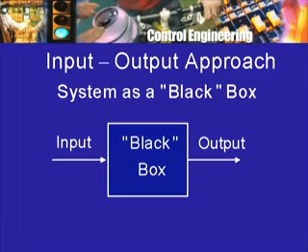So, what do you do with regard to time varying or time invariance property? Well, as the phrase suggests, what we have to do is what is called time shift or time delay, usually in practice, an input. To take a simple example, one may apply to a system a pulse of a certain duration of a particular shape, let us say, starting at some particular instant of time, and then observe the response for some period of time. Then after some time you may again apply the same pulse, that is pulse with the same shape, same width, etc., and observe the response.

Now, you are applying in a way the same pulse, in the sense the pulse shape is the same, but you are applying it starting at a different moment of time. So, this is what is meant by a time delay or a time shift. The response, of course, for the shifted or the delayed pulse will begin later, but what you can ask is whether the shape of the response is the same as the previous response, except for the time shift. Now, of course, this can be done with the help of some notation, and it is the idea that is important and not the notation.

Given any function of time, say f or f of t, one can talk about its delayed version, and several notations are in use. Since we have already used the letter d to indicate derivative, I cannot use d for delay, but one may use the letter delta for delay. So, delta is the delay operator, and then you have to indicate by how much time interval the function is going to be delayed. So, I could write it as delta with a subscript tau, tau being the time interval, operating on f. Now, this produces the delayed function, the function f delayed by an amount tau.

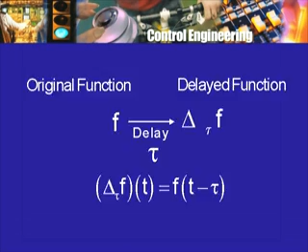To take a specific example, let us say here is the time axis and here is the pulse that I talked about, and let us say it goes from 0 to 1 second. So, this is the function f, as it were, and now if I were to delay it by, let us say, 2 seconds, then the pulse will start here at 2 seconds instead of starting at 0, and then it will last for 1 second as before and go to 0 at 3 seconds. So, this function will be denoted by delta tau f, or in this case, since tau is equal to 1, delta 1 f, that is a function f delayed by 1 second.

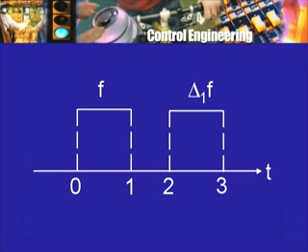So, if this is the input, there will be a certain response, then you apply this input and you observe the response. Just as this input is the delayed version of this input, you try to see whether the response to the delayed input is a delayed version of the response to the original input. If this is so, the system is said to be time invariant, and if it is not so, the system is said to be time varying. Now, this does not require you to know what is inside the black box, what kind of devices, what are the differential equations or algebraic equations or whatever that relate the response and the input variables. It is a test which can be performed externally, so to speak.

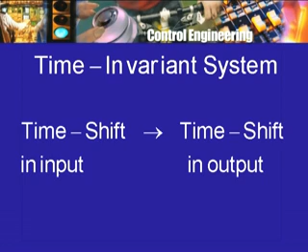But on the other hand, as you are already familiar, one can look at the set of equations or the model, and by looking at the form or appearance of the model, one can say something about time invariance or time varying nature of the system. Again, to start with a very simple example, if the relationship between the input u and the output y is simply y is a scaled version of u, y equal to au, then it is not at all difficult to see that this system is time invariant, and of course, the coefficient a is just a constant.

Whereas, if I had y(t) equal to a(t) into u(t), where a(t) was a function which was not constant, then one can see that the relationship between the input and the output is going to vary with time, and therefore, the system described by this relation is not going to be time invariant.

Similarly, if I write down a differential equation, let us say Dy equal to ay plus bu, as we have done already, a little argument will show you that if the input is delayed, the response will be delayed, and as in the case of linearity, provided the initial condition is 0 or the initial condition remains the same.

That is, the response to an input starting with an initial condition 0 is one, and response to the delayed input starting with the initial condition after that delay also 0 is another response. Then the response to the delayed input will be the delayed version of the response to the original input. This can be seen by actually making use of the definition of the delay operator and substituting in the differential equation and seeing that this is so.

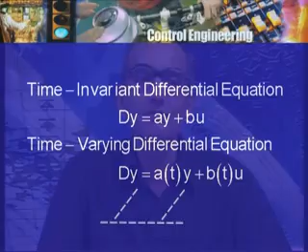That is, shifting the graph horizontally along the t-axis does not change the derivative values, it only changes the instants of time at which the various values are taken by the derivative. Of course, the shape of the wave or the function remains the same. So, this is a property of differentiation, that differentiation is invariant with respect to time shift, or to use a more sophisticated word, translation in time. So much for time varying or time invariant and linear or nonlinear systems.

And as I said earlier, the method of Laplace transformation and therefore the S domain methods using that, such as the root locus method, the Routh criterion or test for stability or location of roots of a polynomial, and the frequency domain methods such as the method based on Bode plots, Nyquist criterion, Nichols charts, etc., are not applicable for systems which are nonlinear, that is, which are not linear, or for systems which are time varying or not time invariant.

Now, of course, as I told you earlier, nonlinear systems and even time varying systems do occur in nature and in engineering practice. The pendulum, whose swing is not sufficiently small, or in fact for no amount of swing, is the pendulum exactly described by a linear differential equation. So, it is a nonlinear system. The fly ball governor would be another example of a system where there would be a nonlinearity.

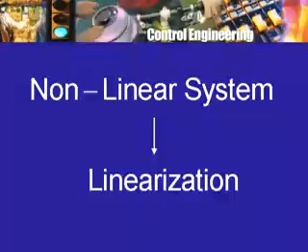Now, of course, this only results in an approximation, and unfortunately one may not be able to know or say much about how good the approximation is. This is one of the major problems which persists even today. In fact, the nonlinear model of the system itself is an approximation to the actual behavior of the system, because you may have neglected so many things, you may have assumed that some things remain constant and so on.

So, the physical system is one thing, the nonlinear model of it is only a model, that is, it is only an approximation to describe the behavior of the system. And then the nonlinear model now you want to replace by a linearized version. So, there is a further degree of approximation, and unfortunately it is not always very easy to find out how good or how bad the approximation is.

He introduced an approach or a method which is known as the Liapunov method or Liapunov approach, and he showed that under certain conditions, if you replace a nonlinear system by an appropriate linearization and then study the stability properties of the linearized system, you can infer something about the original nonlinear system.

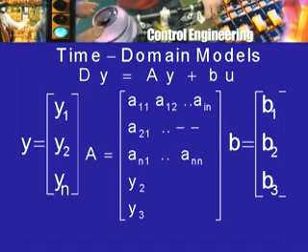Now such a system of equations, which made their appearance and began to be studied and used as the model starting with the 1950s, are known as state variable equations, and such a model is known as a state variable model. In fact, usually the letter y, as I told you, in control theory practice is usually limited for an output, u for an input. Then what is this state variable?

These state variables will not be inputs; they may be an output variable or they may not be an output variable. We do not have time to go into these details. Usually your textbook will have a chapter on state variable formulation of system equations and in particular of control equations, so you should take a look at that.

In that case, the state variables will be a set of variables x. Again, this may be more than one, so this is a vector. The input variable u may be one or more, the output variable y may also be one or more variables, and the state variable equation model, which is very commonly used, is then Dx equal to Ax plus Bu. D denotes the differentiation operation, A is a matrix, B is a matrix.

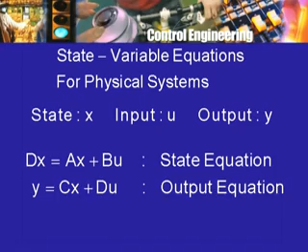In general, the output vector, as it is called, y, is related to x and u through an equation like this. So, this pair of equations is referred to as a state variable set of equations. These are known as the state equations, and this set of equations is known as the output equations. So, this is the kind of model that one can start with instead of starting with transfer function or frequency response ideas.

In fact, if you recall, when we started our discussion of the DC shunt motor driving the load, the simplest load that we talked about, we in fact wrote down differential equations. Of course, in the beginning we said let us consider the operation of the motor in the steady state.

So, the current is constant, voltage is constant, torque is constant, speed is constant. In that case, there are only algebraic equations that relate the various quantities. But since we are interested in the transient behavior, what happens when the motor is switched on, or the load changes suddenly, or the supply voltage changes suddenly, we have to write down the differential equations for the system, and this we did. And let me recall them.

The armature circuit of the motor gave rise to the equation Ea(t), and now I am writing it as a function of time explicitly to allow for the fact that the armature voltage may vary. So, this equals the back EMF, which is Kb into omega(t) now, because the speed also may vary with time, plus the two terms Ra Ia(t), the armature resistance drop, plus the term due to the inductance of the armature, La dIa/dt. Now, already there is a derivative of the current appearing here. So, we have a differential equation.

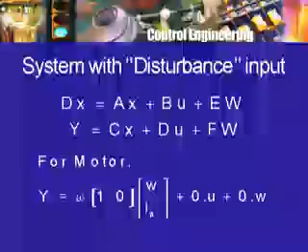What I have written down in the matrix form is only for a linear system. The matrices A, B, etc. may not be constant matrices, that is, they may have functions which change with time, therefore, it can represent linear time varying systems as well, but linear systems. However, one can think of differential equation representation of nonlinear systems and even time varying systems, and a fairly general way of doing that is as follows.

Symbolically I will write x dot, or the same as dx/dt, equals f of x, u, maybe w and t. What do we mean by this? X once again is a vector consisting of several state variables, u is a vector consisting of several input variables, similarly w of disturbance variables. What is this f? Well, this f stands for a vector of functions, not just one function. So, in other words, this just represents compactly a whole set of differential equations as follows.

X1 dot, let us say the first state variable, its derivative is a function f1 of all the state variables, perhaps x1 to xn, all the input variables u1 to up perhaps, all the disturbance variables say w1 to wq, and also a function of time itself. This is what is meant by the function f1. Similarly, x2 dot will be equal to a function f2 of all these variables and so on. Now, these functions f1, f2, f3 etc. put together constitute the vector f.

So, this is a more general formulation, state variable formulation of a system which could be nonlinear, because on this function f1 there is no restriction put on it. So, the system could be nonlinear; t appears here explicitly, so the system could be time varying. And therefore, as you can expect, a large number of systems can be represented by a set of first order differential equations like this. So, this is the state variable formulation for a large number of systems, systems which may be nonlinear, systems which may be time varying.

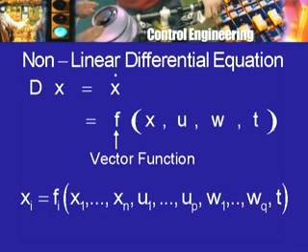Our motor control system is an example of a lumped parameter system, in the sense we are looking only at two state variables, speed and armature current, and we have only ordinary differential equations. I mentioned to you earlier that one can encounter what are called distributed parameter systems, that is, systems which are extended in space and cannot be considered to be lumped. A resistor or an inductor, for that matter, is also distributed in space, but a resistor is represented by a simple relation like V equal to Ri, terminal voltage V, current I.

Similarly, an inductor is distributed in space, but we can represent it by a differential equation like voltage equal to L di/dt. Now, of course, this representation ignores the distributed nature of the inductor, but in many field problems we cannot neglect this variation over a space region. In many problems arising in process control, problems of heat transfer, mass transfer, problems involving flow of fluids and so on, things vary in time and also in space; the space variables are equally important. Therefore, you have additional independent variables, and as a result the differential equations that you get are not ordinary differential equations,

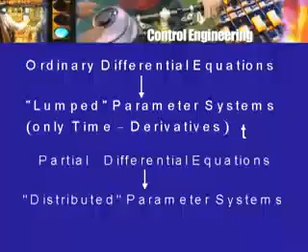but partial differential equations. The subject of partial differential equations, as you can expect, is more difficult than the subject of ordinary differential equations, but one could talk about a similar kind of formulation for partial differential equations as well, although it is not as general as one may want it to be.

Let me illustrate the time domain method for our motor control problem. I will not be able to go into full details, but I just want you to get an idea of what exactly is involved and how the time domain approach will differ from the s domain or the frequency domain approach. So, we have a pair of differential equations describing the control system, and they could be rewritten in the state variable form. Now, there is one way of handling the equations in the state variable form which, as I said, involves a lot of results from matrix theory. I will indicate them to you a little later after we look at a somewhat simpler approach.

Now, here are the two differential equations which involve armature current and the motor speed omega. The variable of interest to us, of course, is the motor speed omega. So, a natural thing to think of is to eliminate the armature current.

In fact, for the steady state equations, this is exactly what we did earlier, to find out the relationship between steady state motor speed, load torque and applied voltage. The armature current was not of particular importance, although it was relevant because the armature current should not become very large and things like that.

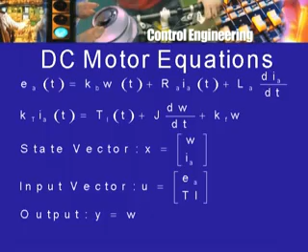What happens to the input terms? We have the input EA, the armature voltage, and the load torque TL. Now, what is going to happen in general is that when we eliminate the variable IA, derivatives of these two input variables may also appear, and so we may have a set of terms like this: B1 into derivative of EA plus B0 into EA plus C1 into the derivative of the load torque plus C0 into the load torque.

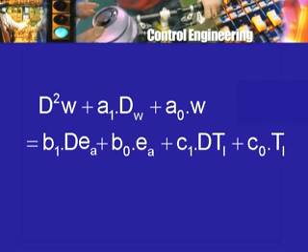So, on the left hand side I have the variable omega and its first and second derivative. On the right hand side I have the input variable EA and its first derivative, and the disturbance variable TL and its first derivative. So, this is the kind of differential equation that I get, and of course, we had looked at such a differential equation earlier when we got introduced to the method of Laplace transformation. At that time we talked about several parts of the solution or response omega, namely the one that corresponds to 0 input or 0 initial conditions and so on.

Now, we can talk about this equation in exactly the same way, although the method of solution need not be the one based on the Laplace transformation. And in fact, we had seen a method of solving a differential equation without involving Laplace transforms. So, let us assume for the moment that we are looking only at the part of the response that will remain when the applied voltage is 0 and the load torque is 0.

For example, the motor has been running for some time and then you suddenly change EA to 0 and you suddenly change the load torque to 0. That is, there is no longer any load and there is no longer any power supply, but still the motor was running. Therefore, because of its momentum, it will keep on running for some time. So, imagine that we are studying the motor under that condition. Therefore, the right hand side will become equal to 0.

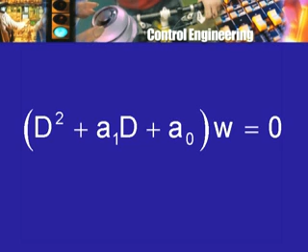And then, as we saw earlier, the equation can be rewritten as d square plus a1 d plus a0 acting on omega equal to 0. That is, we have an operator acting on omega equal to 0. What was this operator called? It was called a polynomial differential operator. In this case, the operator is of degree 2.

So, what was the way of finding the solution of this? The way was to factorize this polynomial differential operator and then make use of certain basic facts like the exponential function satisfies a simple first order differential equation and so on. And then as we saw, the nature or the factors of this or the roots of the equation corresponding to this determined the behavior or the nature of the response.

So, the corresponding equation as it were would be d square plus a1 d plus a0. If you looked at this as an algebraic expression and try to find out the roots of this equation, if the roots of this equation were, let us say, lambda 1 and lambda 2, then the solution omega t could be written as k1 e raised to lambda 1 t plus k2 e raised to lambda 2 t.

This equation of course could be called the characteristic equation, or since of course there is an operator d, what I mean is an algebraic equation. So, think of d as just an algebraic variable. So, the roots of this equation are lambda 1, lambda 2. They are called the characteristic values, or another term that I had introduced at that time was eigenvalues, and the solution therefore looks like this. In other words, when the motor voltage is switched off, the load torque is made to 0, the variation of motor speed will obey a law like this.

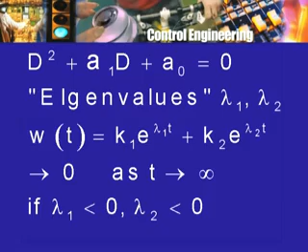So, we may want to change the time constants associated with the motor, change lambda 1, lambda 2, therefore change a1 and a0. But how can we do that? Our differential equation is given like this. So, what is it that we can change? Now, this is where we can use some of the ideas from feedback theory that we have studied earlier, namely proportional feedback, derivative feedback, integral feedback and so on.

Well, we have the input variable EA now, and of course, the input variable EA we had put equal to 0. But now, as in the case of feedback, we could have the input variable coming from not just the applied armature voltage or the reference voltage, but coming from a difference of two signals. One was the reference voltage, let us say R(t), and the other was the signal obtained as feedback based on the speed, and this difference could be then EA of t.

So, EA of t could be R(t) minus this feedback signal, and even if R(t) is set equal to 0, the feedback signal is still there, and therefore, although the external voltage is reduced to 0, internally to the motor the applied voltage is not going to be necessarily 0. So, in other words, we can express EA as R minus, what did we have earlier? We had the k tacho generator omega. Of course, there was a gain k that we had introduced, because this difference may be small enough, and therefore, we really had EA equal to k, the gain of the amplifier, multiplying R minus k tacho generator omega. So, this is what one may think of doing.

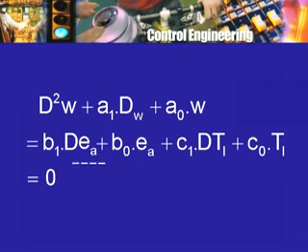Now, if you take the differential equation that we had here, and now EA is going to be obtained as k times R minus k tacho generator omega, you will see that because there is this multiple of EA here, there will be a multiple of omega which will be introduced on the right hand side. Because there is a derivative of EA and a multiple of it here, the derivative of omega also will appear on the right hand side.

Of course, in addition r and dr will appear on the right hand side. So, what is going to happen is, and I am going to show it only symbolically, I am not going to write down the exact expressions. We have on the left hand side d square omega plus a1 d omega plus a0 omega. So, I am just going to write all that stuff as simply this operator acting on omega equal to,

what will happen is, now because of the feedback Ea involving omega, there will be now a term which has d omega on the right hand side, there will be a term which has omega on the right hand side, plus there will be a term involving dr, another one involving r, and then as before the torque terms dTL and TL.

So, with feedback, and what kind of a feedback it is? It is proportional feedback, because we are taking a multiple of the variable omega as the feedback signal, and then taking the difference between the reference signal and this and amplifying it to generate the applied voltage, armature voltage Ea. So, this is what the equation is going to look like. And now we can set once again r equal to 0, TL equal to 0, that is the external voltage is made 0, the load torque is reduced to 0.

What will happen? Now, we have these additional terms on the right hand side, and of course, we can transfer these terms to the left hand side. Therefore, the left hand side now with this change made will look like d square as before, but not a1, but a1 prime d or a1 dash d, that is the coefficient a1 will change, plus not a0 any longer, but a0 dash omega equal to 0.

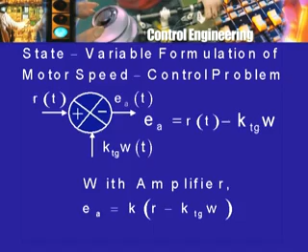So, what is it that we would have done in this case? We have changed the operator from d square plus a1 d plus a0 to d square plus a1 dash d plus a0 dash. And how has this change taken place? This change has taken place through the proportional feedback. Now, what this a1 dash will be and a0 dash in terms of a1 and a0 and the feedback equation, the tachogenerator coefficient and the gain of the amplifier, it will depend on all of these.

And I would like you to work out the exact expressions for a1 prime and a0 prime in terms of the old coefficients a1, a0 and the parameters of the feedback, namely the tachogenerator coefficient and the gain of the amplifier k. But the point is that the differential equation is changed, the characteristic equation is changed, and therefore the solution of the equation will also change. We expect therefore that the eigenvalues will have changed. The solution may still go to 0 as t tends to infinity, but it will do in a different way at a different rate.

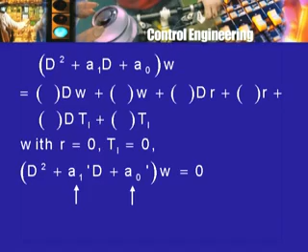And so, we can now pose the problem, well, is it possible by using this feedback, choosing K tachogenerator and the gain K, to change a1, a0 in such a way that the behavior of the system is improved, the response of the system is changed to what we want. Originally, the time constants may have been large, typically one of them is large, the other one may not be so large. We want to reduce them.

Can it be done? We can also ask whether the system can become unstable by means of this feedback. That is, the roots of this may become such that they have a positive real part or they become purely imaginary. So, the system response becomes oscillatory or even tends to grow exponentially. Can that happen? The answer in this case is no.

As we saw earlier, proportional feedback using the method of Laplace transform and transfer function and the root locus approach, there will not be any instability, but there could be oscillatory behavior of the system, but damped oscillations. You can check using this approach that can happen. In this approach, of course, I have not taken Laplace transforms anywhere.

I am only looking at the characteristic equation of the system. Then I know the fact that if I factorize the characteristic equation, certain coefficients or eigenvalues appear and they determine the nature of the response of the system. I am making use of that and answering questions which we had looked at and answered earlier using the method of the Laplace transformation.

So, this is something I would like you to carry out for yourself, and this is an example of a time domain method. Now, this is about proportional feedback. What about derivative feedback? Can we use derivative feedback? What about integral feedback? Can we use integral feedback?

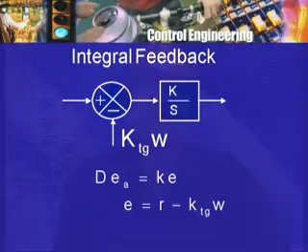So, we will have more coefficients now, but again we can factorize the characteristic equation, look at the eigenvalues, see whether they all have negative real parts or not, and so on and so forth. So, this is something I would like you to do, and then we will complete this example as an illustration of one time domain approach. The other time domain approach will involve some matrix theory and some matrix manipulations. So, I will not be able to go into great detail as far as that other approach is concerned.